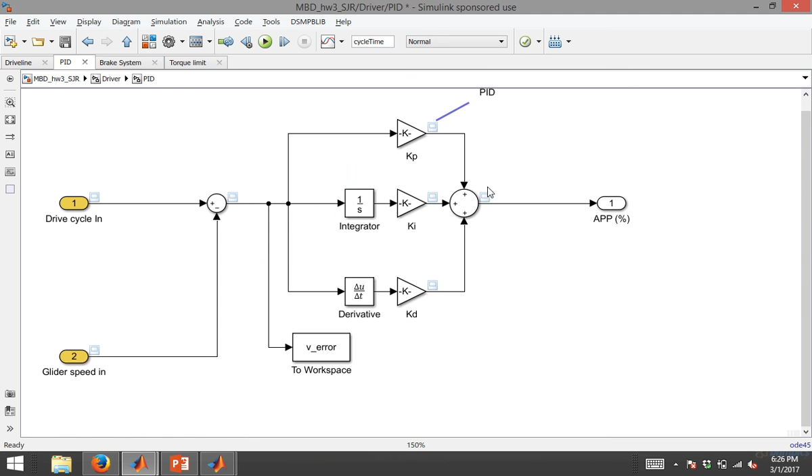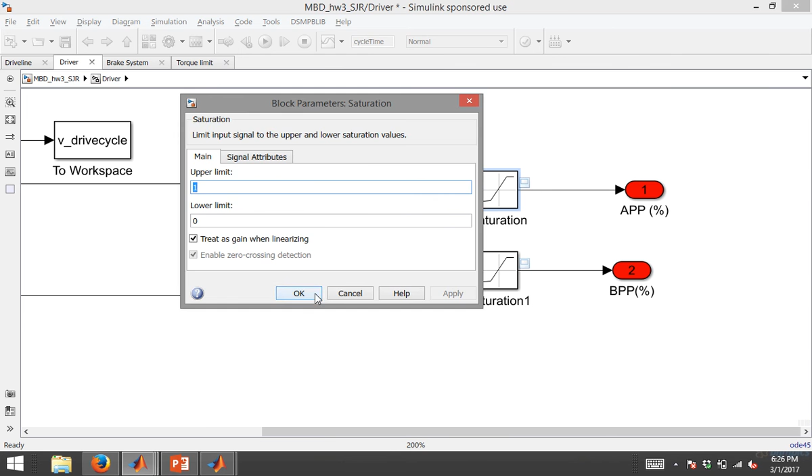Your PID, the actual base of it, won't have to change at all, but the output is no longer going to be a tractive force. It'll be an accelerator pedal position. For your accelerator pedal, you want to saturate that output from 0 to 1. And for your brake, you want to saturate it from 0 to -1.

What we're assuming is that the driver is never going to be pressing the brake and the accelerator at the same time, which really they shouldn't.

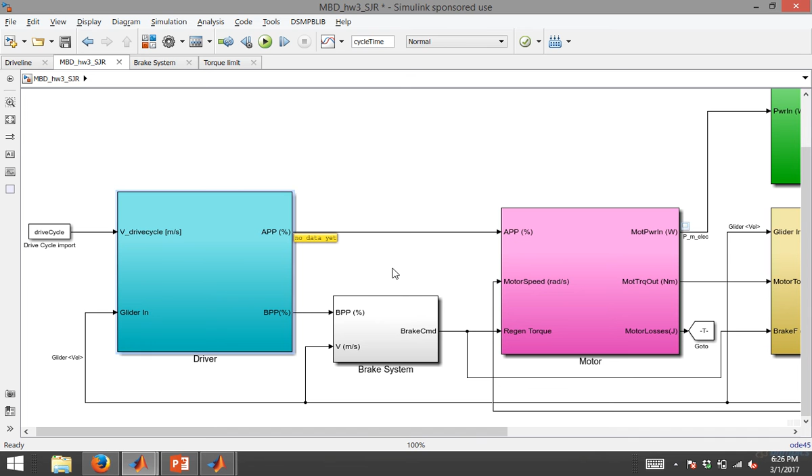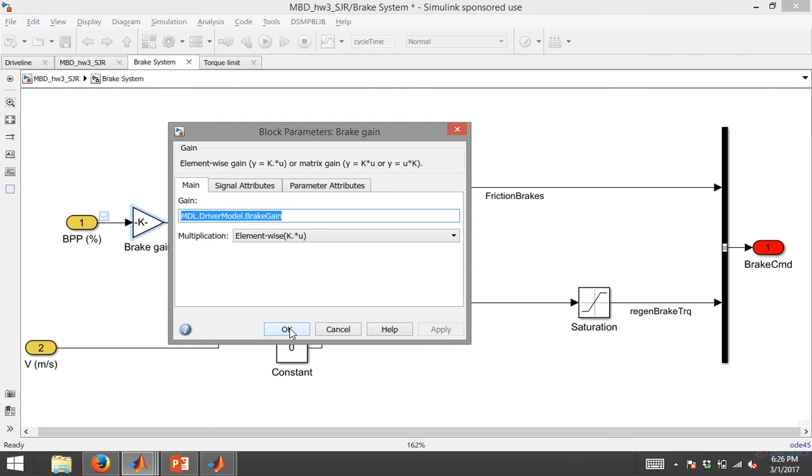For the brake system, this one is pretty simple. You take in the brake pedal position, multiply it by a brake gain, which in our case is the maximum braking force available. And then from there, you'll split it into conventional brakes up at the top here and regen brakes at the bottom.

For your friction brakes, it's going to be 1 minus your brake fraction. So if your brake fraction is 10%, then really it's your regen brake fraction. So 10% of your brake is going to come from regen, and 90% is going to come from your friction brakes.

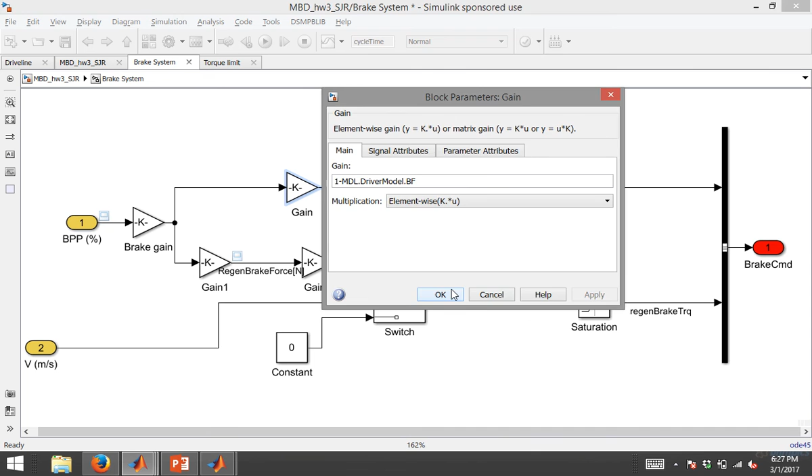So it'll be 1 minus your brake fraction, and that'll just be your friction brake force. That'll come back in the DriveLine model.

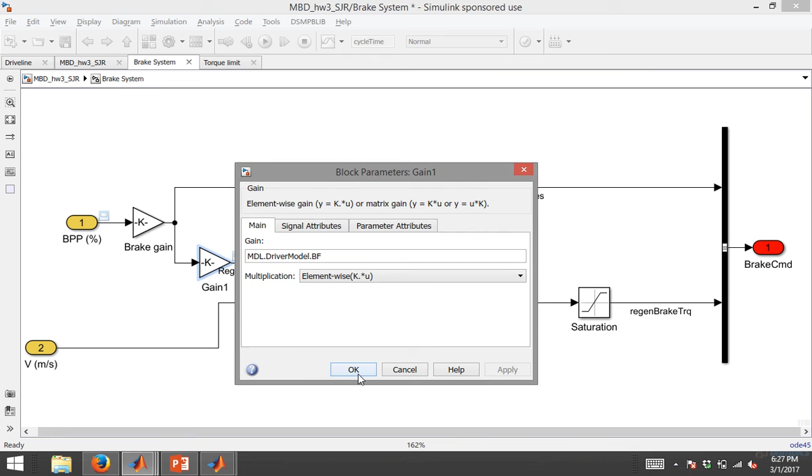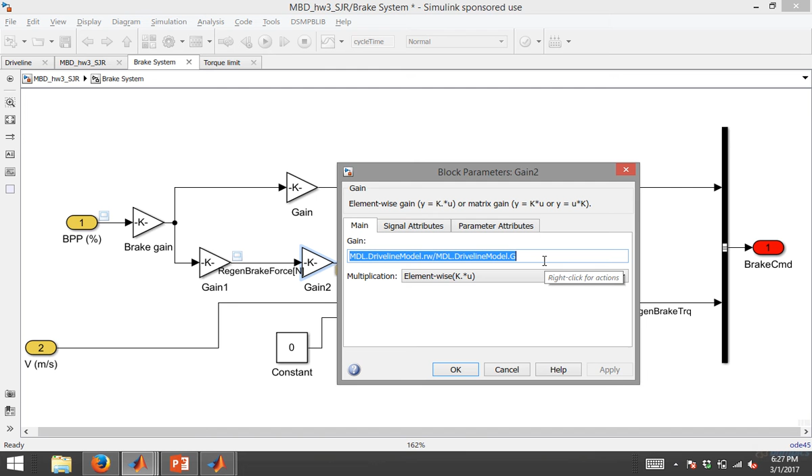For your regen brake, you want to multiply your brake fraction by your total force, and then multiply by the wheel radius. So now you have the torque at the wheels, and then divide by the gear ratio of the final drive. That'll give you the torque at the motor that you need.

And then you should use a switch like this one and have velocity as the input. The reason for this is that in regen braking, you actually want to not do any regen below about 5 miles an hour. Motors are not super efficient at low speeds and low torques.

So if you're coming to a stop, you don't want to have your regen on. Since this will be in meters per second, I would set it at about 2. I think it's actually like 2.2 something, but around 5 miles an hour is fine.

So what the switch will do is if it's greater than 2 meters per second, it will use this one. If it's less than 2 meters per second, it'll use the bottom input, and for that you just want to zero it out.

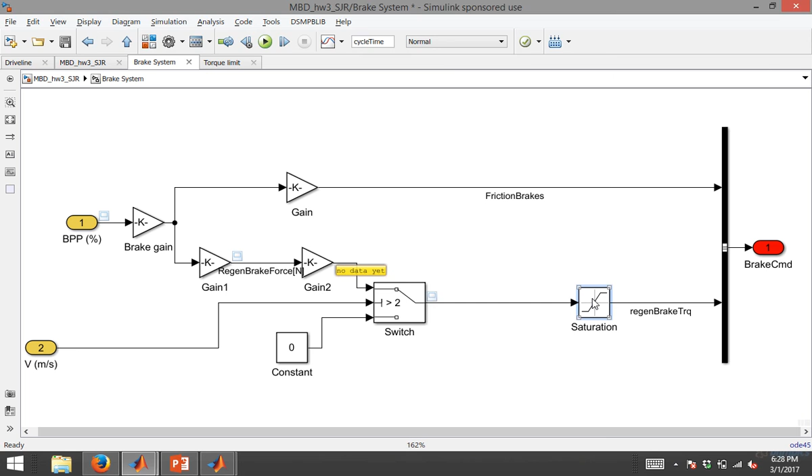And then I have this saturation here just to keep sanity, but it's not necessarily needed. I limit it from 0 to -500 just to make sure that I'm not going to exceed the total brake force capability.

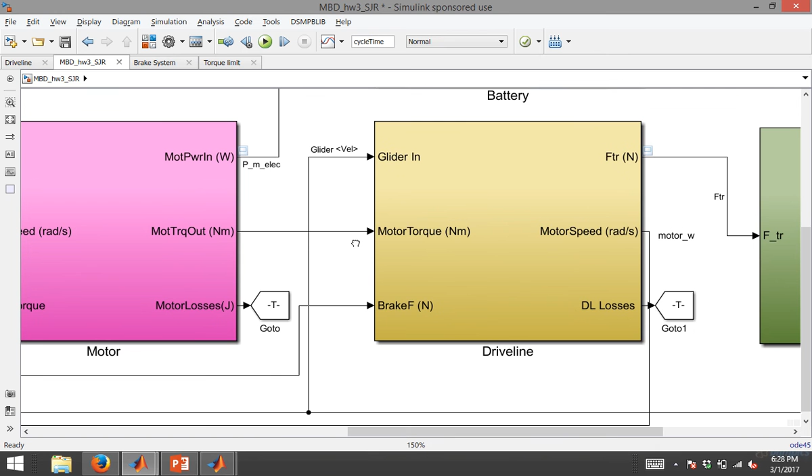So for the motor, you've got 3 inputs: your accelerator pedal position, your motor speed in radians per second, which is calculated in the DriveLine, and then your regen torque. I'll go over that when we get to the DriveLine model.

Oh, this is the one that doesn't have it. Dang it. All this would be here. I'll actually just start making it.

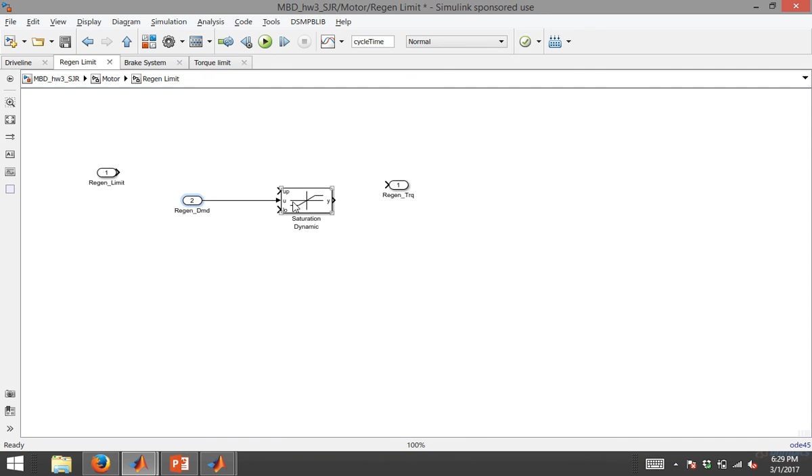So, dynamic saturation. What you want to do is take your regen demand and have that be what's going to be saturated. Your regen limit, which I'll go over how to calculate, you want that to be the lower bound because it's going to be a negative number. And then your upper bound is just going to be a constant at 0.

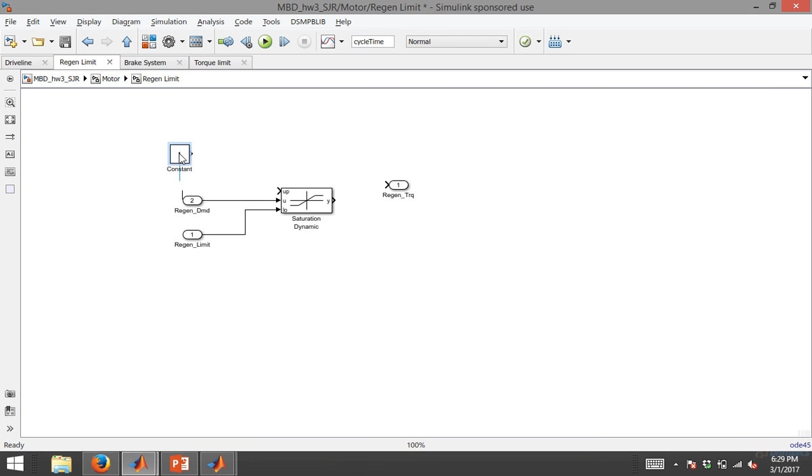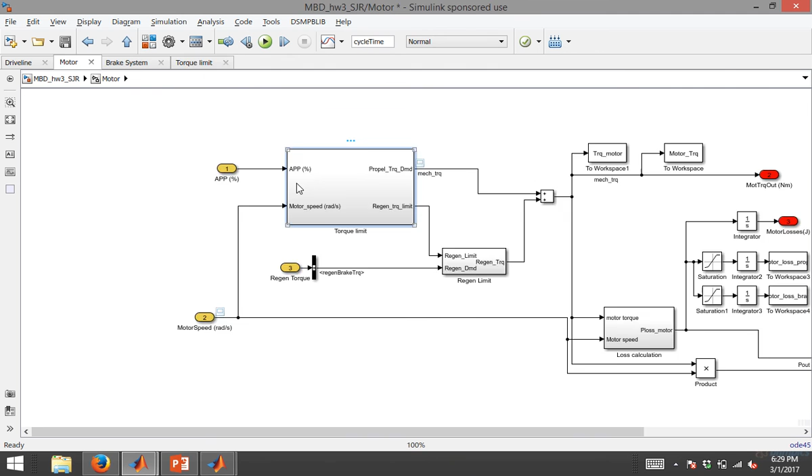Now for the actual torque limit, you're going to take in your APP and your motor speed. So what you want to do is take your motor speed in radians per second, divide your maximum motor power. I think for this one it's 200 kilowatts. It might be 100 though.

Divide by your motor speed. That'll be your power limited torque, and then your actual maximum torque. Take the minimum of that. This is really similar to what you guys did in the PID for the driver model, and that's going to be the maximum torque that you have available.

If you multiply that by your accelerator pedal position, then you have your propel torque. That way, 100% accelerator pedal is as much torque as you can possibly provide right then, and 50% is half, etc.

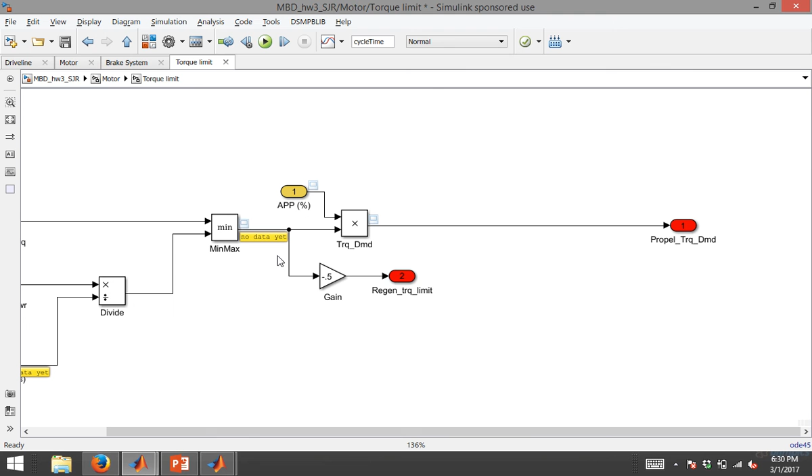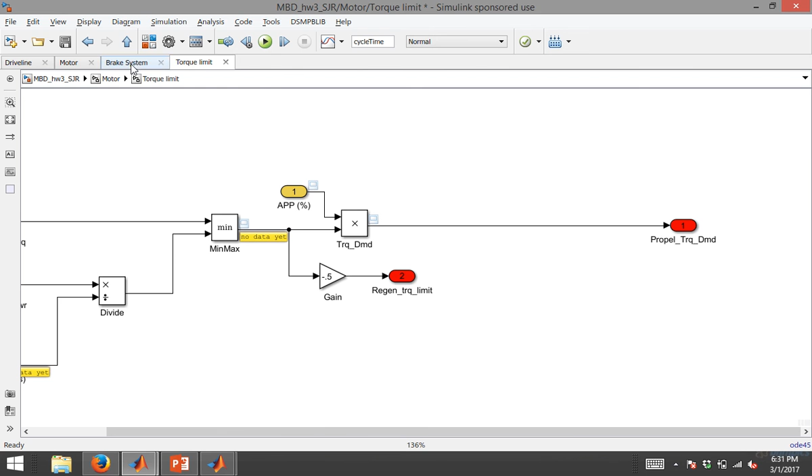Then take that same limit, multiply by negative 0.5. In regen, we generally don't go to full power or full torque on the motor, so negative 0.5 will put you around what you would realistically see in a regen braking system. That regen torque limit is what gets fed back into this subsystem.

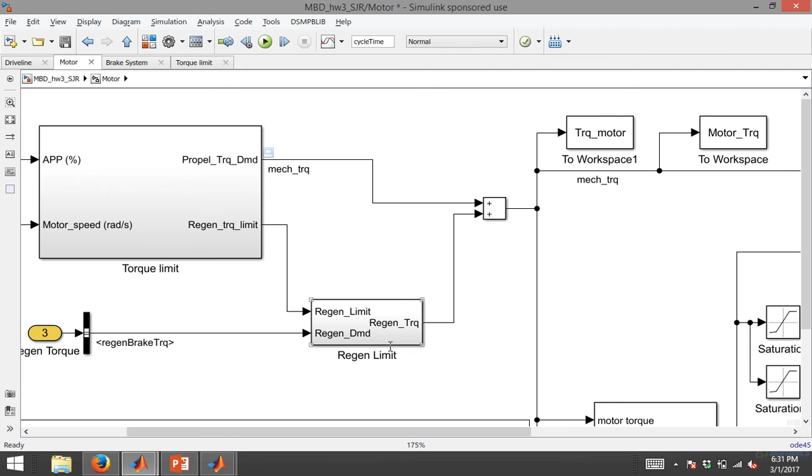So from your regen torque, which is going to be negative, and your mechanical torque coming out of the motor torque limit system, which is going to be positive, for me, I just add them together. Again, it's a sign thing - if your regen torque ends up being positive, you want to make sure this says negative. But as my regen torque is negative and my mechanical torque is positive, I can just add them together. So that's going to give you your torque out, which is one of our inputs.

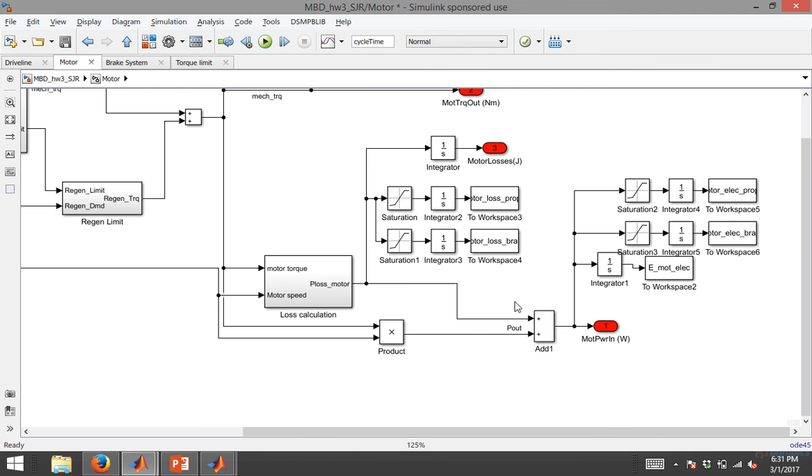The other output that's important for the battery model is the required motor power input. So you take your motor torque and your motor speed, and you do the loss calculation.

This is a little bit messy as I have it displayed right now, but this is exactly the equation given to you on the assignment sheet. It's just implemented in Simulink. The KC, KI, KW, or K omega, and C values - those I also put on the assignment sheet.

Those should be actually pretty close to HEVT's motor, the one that's in the car right now. We haven't dyno tested that motor, so maybe it's not exact, but it should be pretty dang close. And from that, you can get the power loss at the motor.

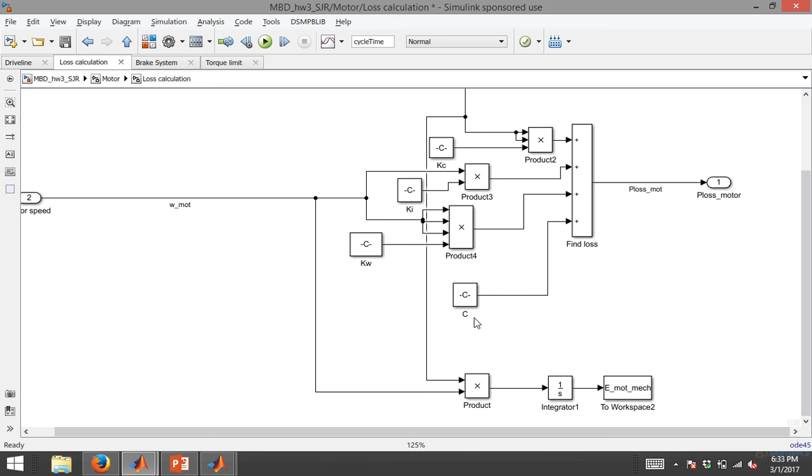Something else that I also do in this block is I log the mechanical energy in the motor. If you take motor torque and motor speed and multiply them together, you get the motor power, and then I just integrate that to get the mechanical energy.

So from that P loss, you can see here I do the same thing I did before. I break it out into propel and brake losses, and I also just have my overall motor losses by itself.

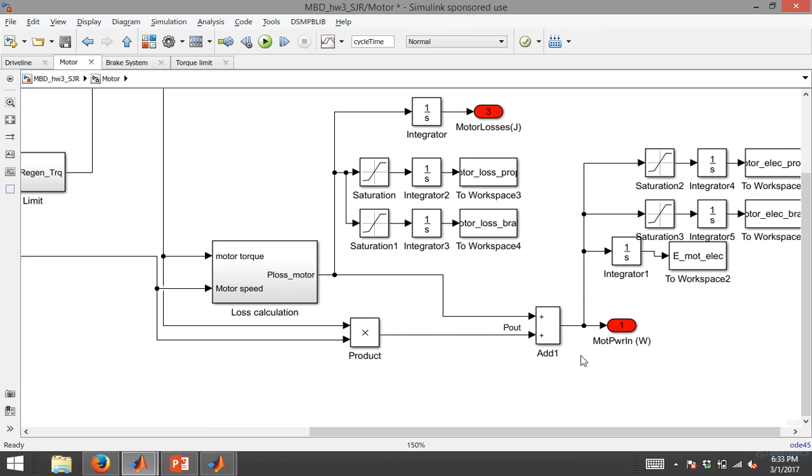And then to get the total motor power needed to produce what I'm doing at the output, the mechanical output, I multiply motor speed by motor torque, get the motor power out, add that to my losses, and I get the motor power in. The motor power in, break it down into the electric power needed for the motor, as well as the electric power during propel, the electric power during brake.

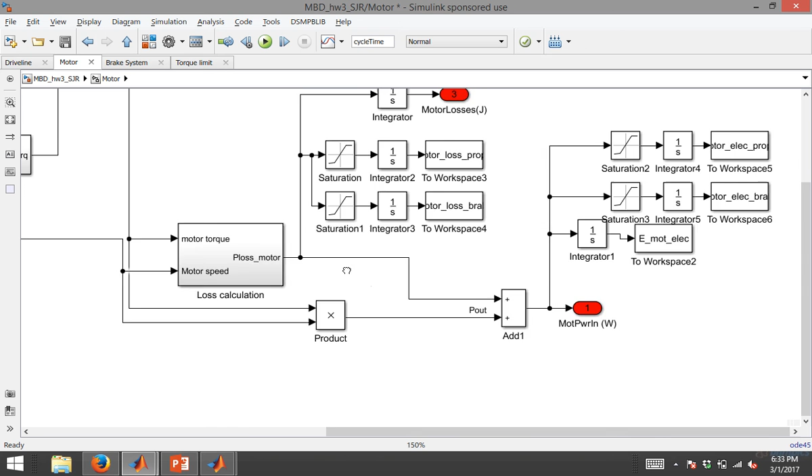Something to note here is that your P loss will always be positive. So if you have your P out - you're driving the vehicle, putting out a positive torque, so your P out is going to be positive - your P loss is going to be positive. So the power needed to overcome those losses is greater than the power that you're actually outputting.

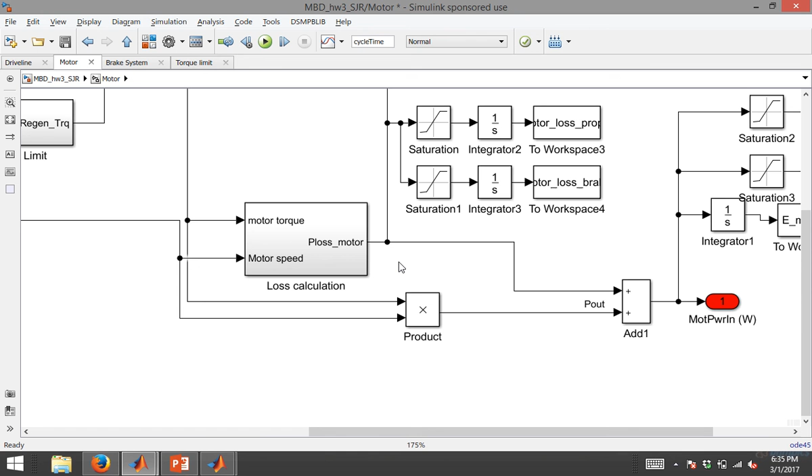And then if you've got a negative P out, so you're doing regen braking, you have this large negative number, but you add your losses to it. What that means is the power that you're actually getting at the battery pack is less than the mechanical power that's going on at the input to the motor. So the way that we have this set up, it doesn't matter if you're in regen or in propel, your losses are going to work against the motor output. So that's how you get the motor power in.

For the DriveLine, this is where we get the motor speed, what we calculated in here. We take the glider velocity in, the motor torque, as well as the friction brake force that we had earlier.

Here what we're doing is we take the motor torque in. This is a sign block, so if we have positive torque, the output of this is 1. If we have negative torque, the output of this block is -1.

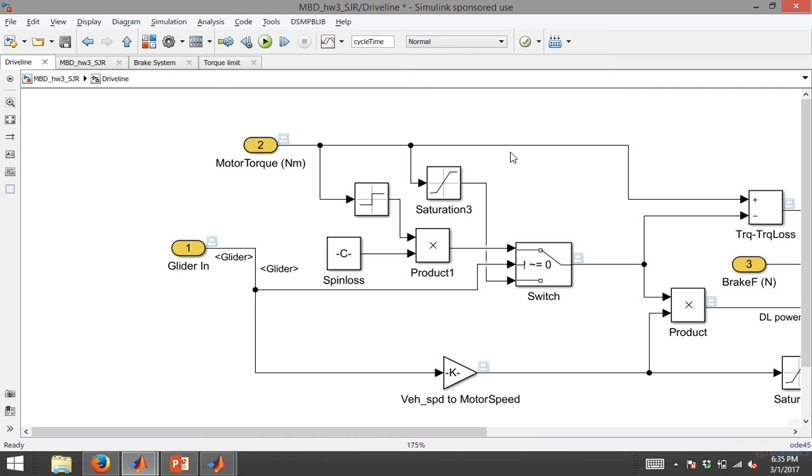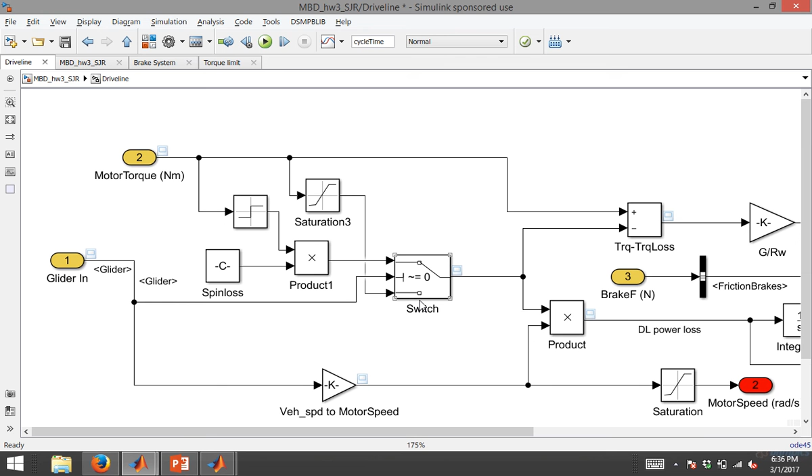Multiply that by the spin loss. So if the motor torque is less than the 6 Newton meters that we're losing to the spin loss, it's not going to be able to actually spin the wheels. So the purpose for this switch here is that when we're below 6 Newton meters, it basically rises up to match the torque being produced. But then after that, it switches over, and the torque loss in the drivetrain is actually going to be just 6 Newton meters. So it's not going to keep building after that. That's the purpose of that switch.

And then here, because my output here is actually the same sign as the motor torque, I need to subtract it to get the actual output torque, since it's torque minus torque loss.

Multiply that by the gear ratio, divide by wheel radius to get the force at the wheels from the motor, and then take the friction brake force, which for me is already negative, and add it together to get the total force output that you can input to your glider.

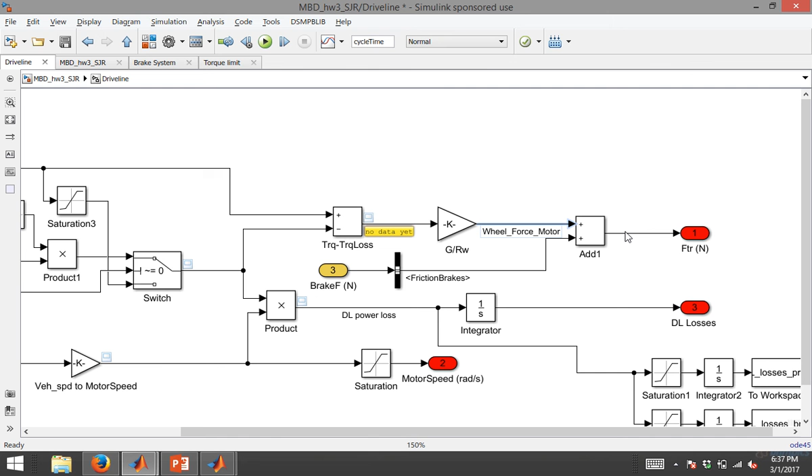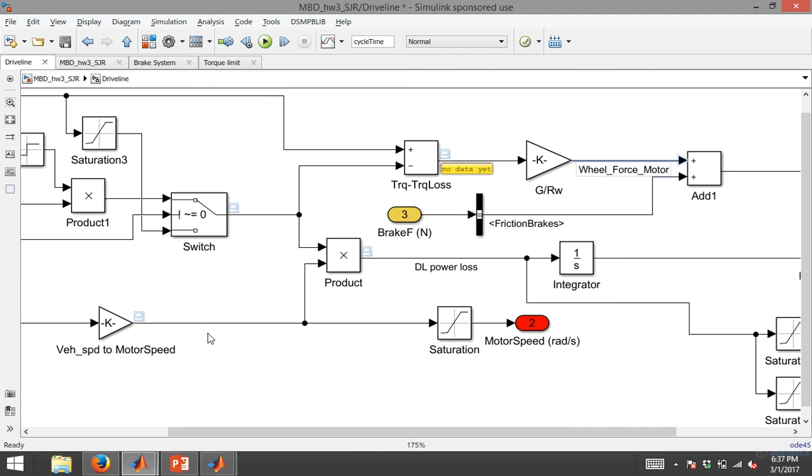To get the driveline losses, take your spin loss. You want to do it after the switch so that you get the actual spin loss that's going on. Multiply that by motor speed, which you can calculate from taking vehicle speed and multiplying by the gear ratio and dividing by the wheel radius. The reason for this is that here we're going from wheels to motor, not motors to wheel.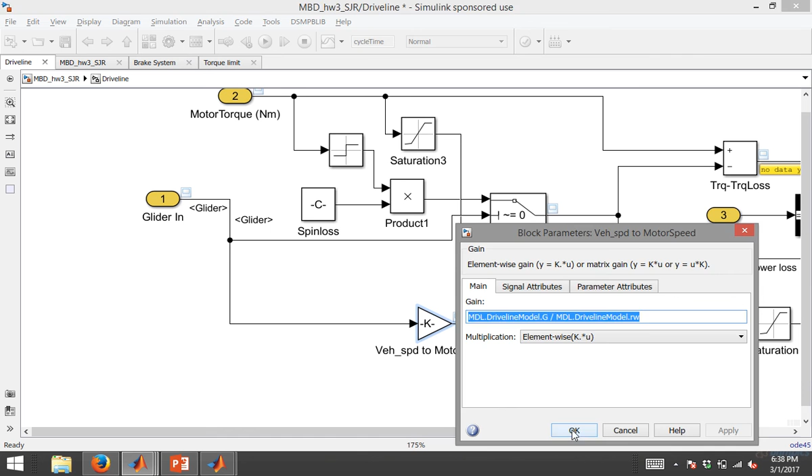It might get a little confusing because in one we're not going the same direction for torque and speed. For torque we're going motor to wheels, speed we're going wheels to motor. So the actual gain here is going to look the same as going from motor torque to wheel force, but multiply by G, divide by the wheel radius, G being the gear ratio, to get the motor speed.

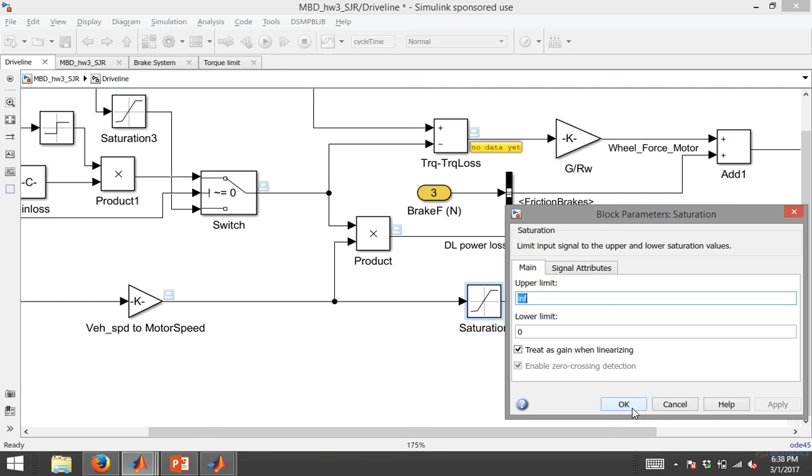So this is not needed in all cases. You might need it if something is going weird in your model. I have it here because of a different bug that I was having. But if you're having a weird issue where motor speed is going negative, this is something you can do to try and figure out if that's what's causing your issue.

If I put a saturation block on my motor speed from 0 to infinity, so I'm only letting everything else see positive motor speed, if that fixes the bug, then probably that would be the only way to fix it. If it doesn't fix it, it means that's obviously not the problem going on.

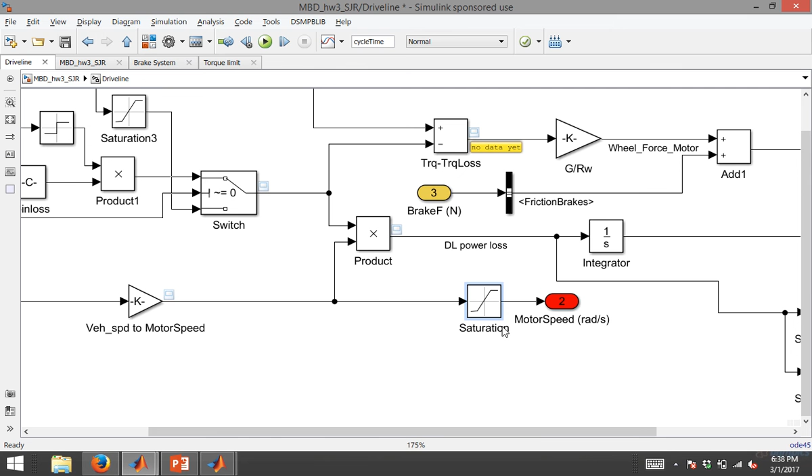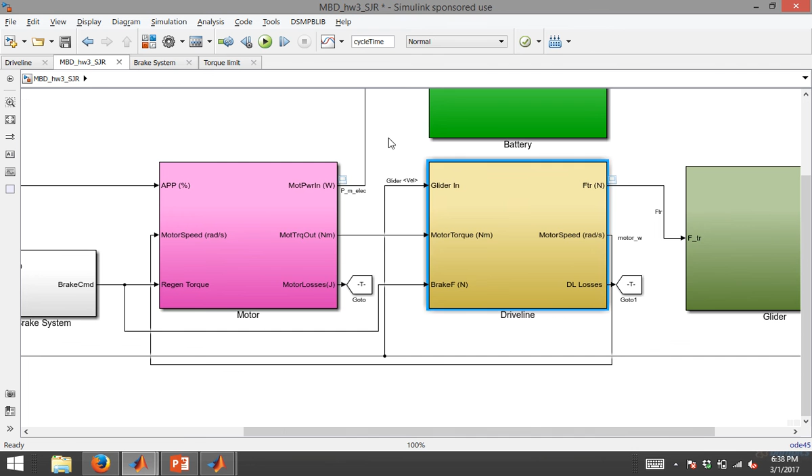So take motor speed, take your spin loss, multiply them together to get your driveline power loss, and like everything else, we break it out into propel, brake, and total losses. And then you can output your tractive force.

Your glider is unchanged from previous gliders, so you shouldn't have to do anything to that to get it to work. If you're having bugs with your glider model,

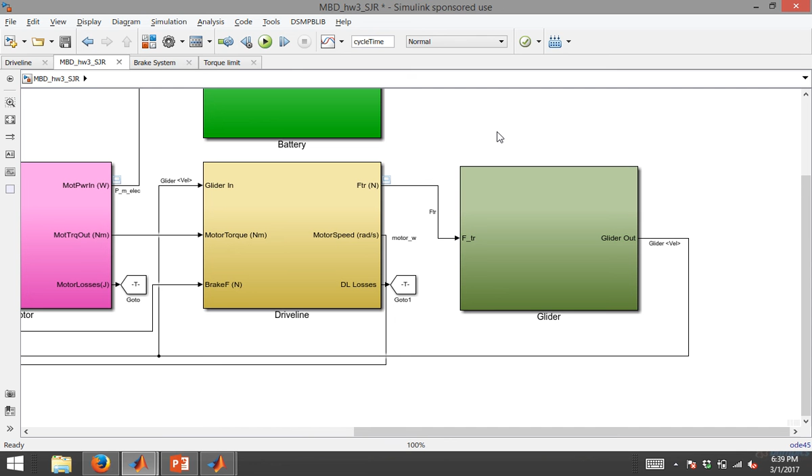But you don't have to — if your glider is having problems, don't have that keep you from working on the other models. Take just your motor model and make sure that works as expected. Take just your driveline model and make sure it works as expected. That way, if you know which individual subsystems are perfectly fine, you don't have to touch them. You can concentrate on just whatever is going wrong. You don't have to worry whether this is a problem in your driveline model or a problem in your motor model. If you test each one individually, you can identify exactly where it's coming from.